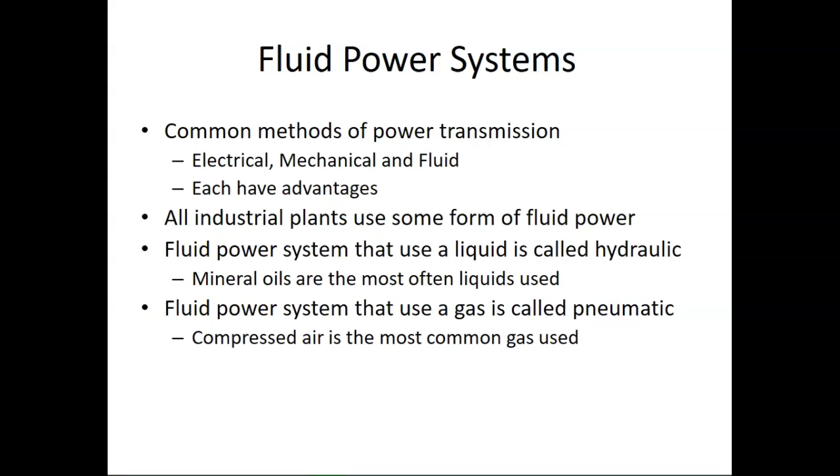So pneumatic systems, there's a lot of things we do with pneumatics. Pneumatic tools, where do you see those? Just about anywhere we want a little extra power that we can't do with muscle power, right? Construction sites use them. That's one of the cooler ones. Construction sites use them a lot.

And what's come about in the last few years is that they've now figured out how to use pneumatics to lift heavy objects and make it where instead of having a 10-man team to push it, you can use only 2 to 5 guys and move something that can weigh several tons. And what they do with that is they create an air cushion up underneath.

Anybody ever play air hockey? Everybody's played air hockey before. How does the puck move? It's air on a table. They figured out how to use that same thought pattern to move extremely heavy objects with like barely a finger push. Think about that for a minute.

Using pneumatics, who would have thought to use pneumatics to move something like that? It takes a lot of air pressure to push against whatever you're trying to move. But once you get it lifted, it moves as easily as an air hockey puck across the table.

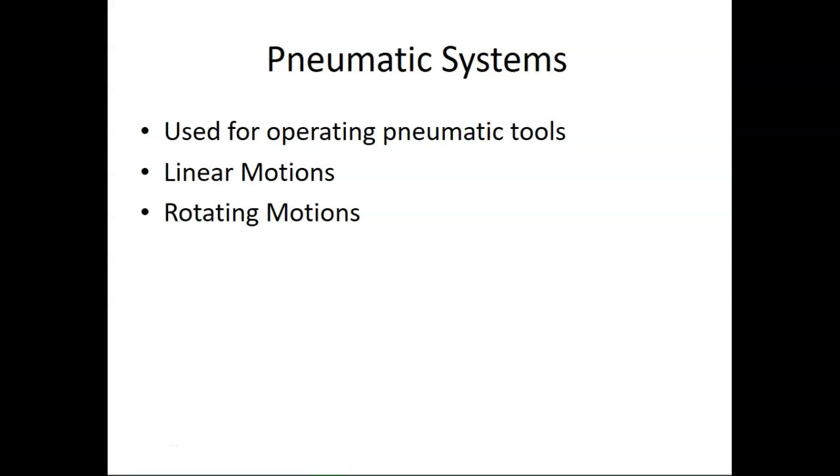Fluid power is the use of fluids under pressure to generate, control, and transmit power. Hydraulics is liquids, pneumatics is gas. Now, some of this is a bit of a misnomer, because yes, you can pressurize gases, you don't really pressurize liquids so much.

Anybody know what happens if you overpressurize liquids? You're gonna blow a seal. You can bust a pipe. You can blow a seal. It's really nasty stuff.

I'll give you an example. I have an older brother, and my dad lent him his truck one time for a long time. Now understand, my brother's not always the smartest man in the world. He decided one day the truck was low on oil, so he put about 5 quarts in it. The truck takes 2. He blew every seal in the truck because of that.

So hydraulics don't like a lot of force. They like a little bit of force. They can tolerate it. It makes them move.

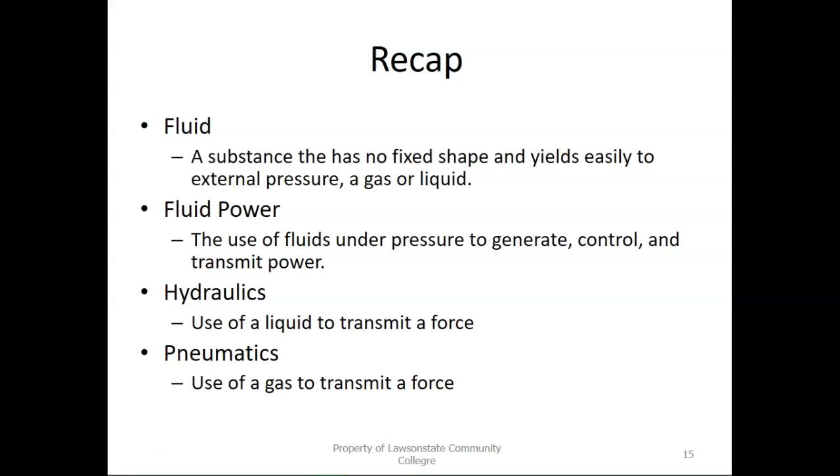So here's some terms that you're going to want to write down or at least kind of memorize. Let's start off with force. And no, I am not talking about the Force. We're talking about force. Sorry, stupid Star Wars joke. Showing my geek.

So force is anything that causes change. It either is the change or changes the state of something else. Newton's laws, that's kind of what we're following here, right? I can't remember which law it is, but every action gives you an equal and opposite reaction. I believe that was the third law. But that's basically what force is. What you're doing with force is making something happen. It's a way to create change.

We're going to be talking about area. And most of the areas we use when it comes to hydraulics and pneumatics, unfortunately, are not square. So how many of y'all remember how to find the area of a circle? Pi r squared? Pi r squared, yep. There's a lot of them out there, guys. There are some easier ones, though.

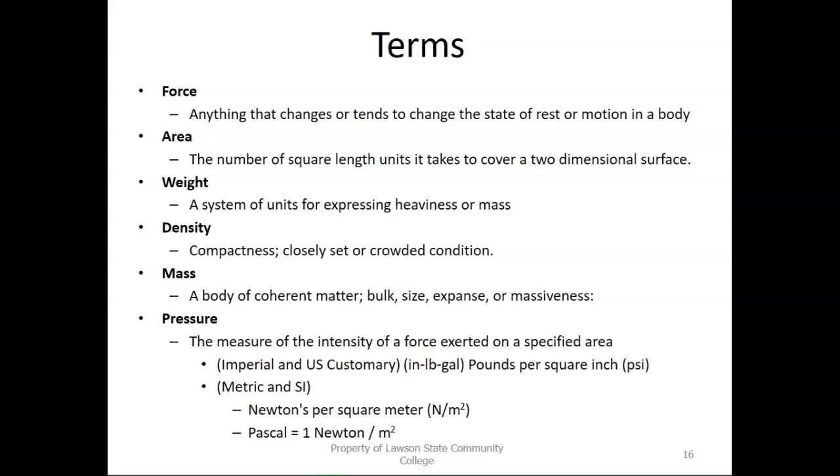So, units. No, you don't have to write this down, this is just how it was working these days. As far as units go, the U.S. customary system is based off of very weird measurements. I mean, seriously, a foot is 12 inches, but a yard is 3 feet. Who came up with that? Who in their right mind? Seriously, think about it.

So yeah, it is still used in the USA, Myanmar, and Liberia. Three countries are holding out onto this. Some of it is still used a little bit in Great Britain, but most of them have moved over into the international standards, which are based on the meter, kilogram, things like that.

So the imperial system is very similar to the U.S. customary system. They do have some measurements that are a little bit different than ours. But like I said, for the most part, those two systems are dead. Why? Because if you really stop and think about most of them, they make no sense at all. Seriously, look at the different tables and stuff and ask me how that happens. So most of the world has gone on to the International System of Units, otherwise known as the metric system. Why? Because it's all based on 10 and it makes sense, and it's very easy to calculate from anywhere in that point.

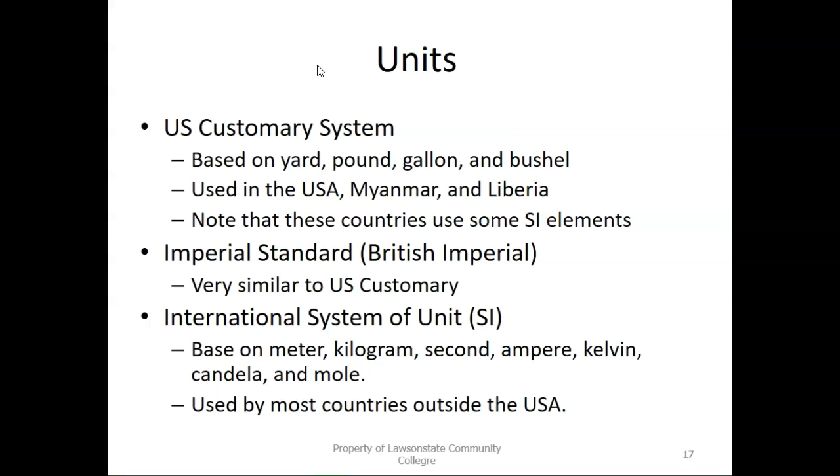So we're talking pressure. This is the amount of force exerted on an object divided by the area. Any of you have ever taken DC or intro? You know what a circle means: it means we've got a formula. So force is equal to area times pressure. Force is area times pressure. And that is a hard and fast one that is true no matter what.

Okay, so there's 3 types of pressure that we measure. So first of all, does anybody know what the pressure you feel at sea level is? Anybody at all? The pressure is 14... At sea level. Now, the reason I'm saying at sea level does not mean that it is not a universal thing you're going to feel. If you go up to the top of Kilimanjaro or the top of Everest, not so much pressure.

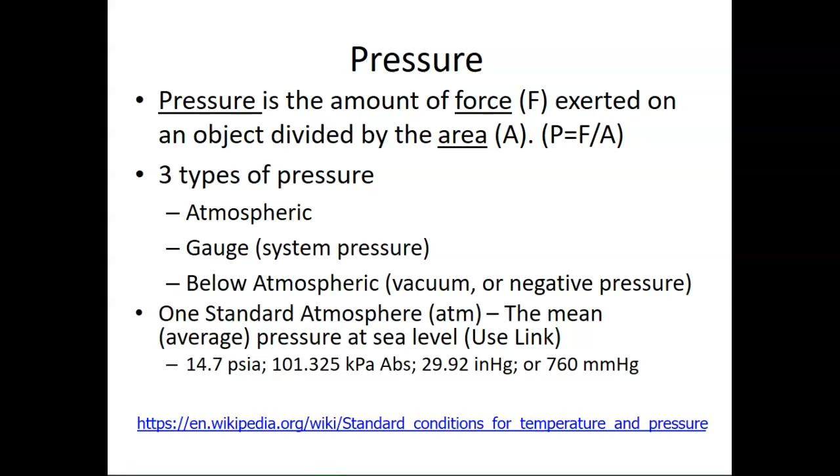Probably would help if I had my mouse on the right thing.

So pressure units, there's a lot of them. You have pounds per square inch. This is the basic and most common one here in the U.S.

Unfortunately for us, the rest of the world is not us, so most of them do not use PSI. They use a lot of other ones. To begin with, you have Pascal, that's dealing with newtons exerted on 1 meter square. You have kilogram force per square centimeter, and I know there's several different ways you can say centimeter. I've always said it centimeter, so if you say it differently, I'm sorry.

Kilogram force per square centimeter, you have bar. Now that one you might have heard of or seen if you look at a pressure gauge. Some of them do have bar on them, or you might have seen KPA. You've probably seen bar. Torr, not so much. Inches of water, probably not very much. Inches of mercury or millimeters of mercury, yeah, those exist and they are used. And head pressure, I'm not sure quite where you would use that, but it is one that is out there.

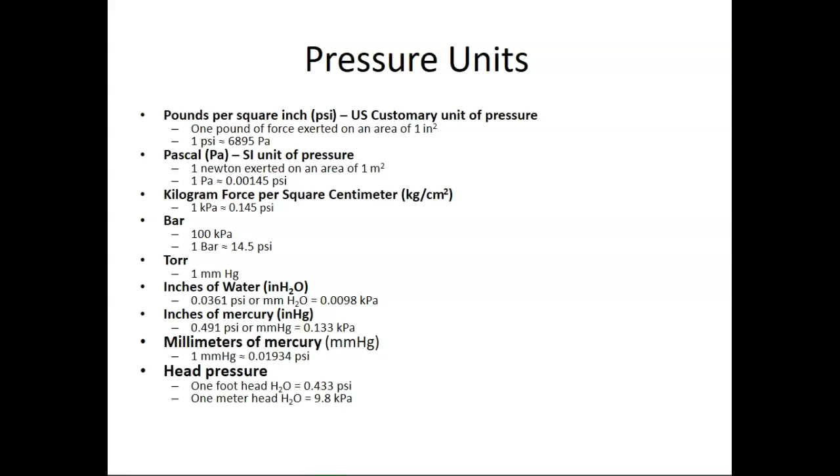And here's some different conversions, quite a few different ones. The main one we'll be using in this class is PSI because we are in America and we still use PSI here very frequently. The other ones you might want to start looking at just to have in your head, because they do exist outside and we do have gauges here that use them.

Would be the Pascal, kilopascal, or megapascal is what that one is. Bar is one that you'll commonly see, and you might see millimeters of mercury, that's the one with the Hg to it. But bar and Pascal are the ones that are most commonly used on gauges you might come across here. I said that we'll be mostly using PSI in this class, but it's just a good thing to know how to calculate these.

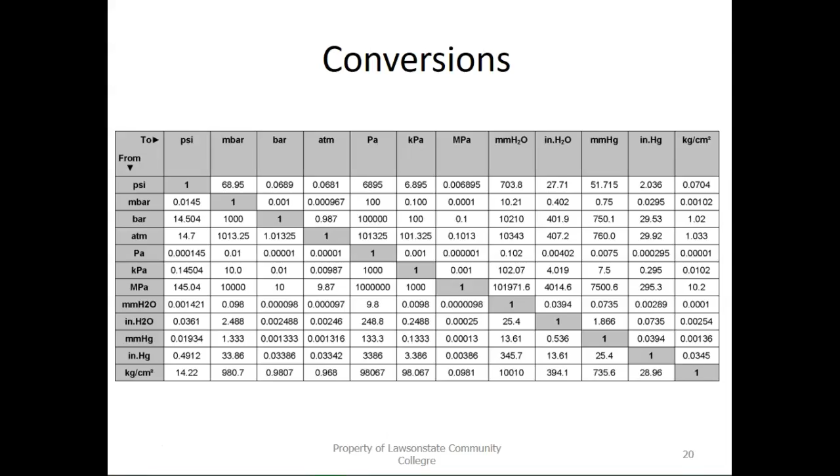Gauges, how many of you, I'm assuming all of y'all drive. So on your car, what do they have as the speedometer? Most cars, I don't know if they have them on all the cars, and especially not the new ones these days, but at one point all cars had miles per hour and kilometers per hour. How did you tell the difference? Same way you tell the difference here. They will give it to you either in a different color, or they just put it on the inside of the gauge instead of the outside.

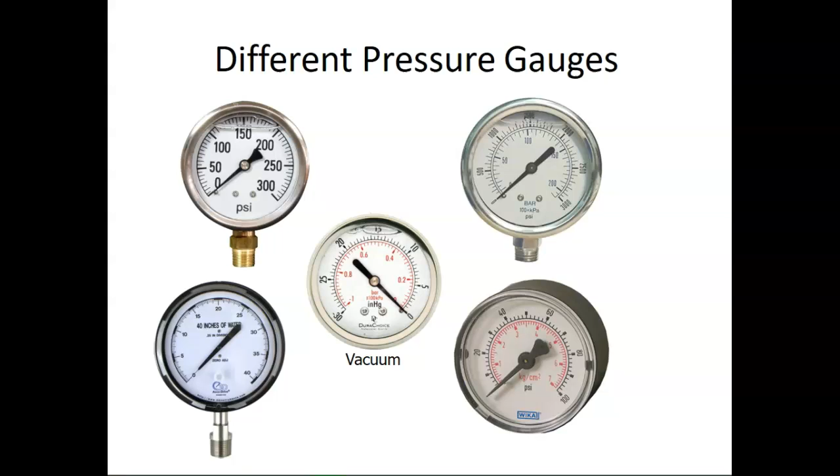This one is pulling a vacuum, and it's looking at inches of mercury, or again, it's looking at bar. So even with blood pressure, it's given in millimeters of mercury, not PSI. Or it could even be given in inches of mercury.

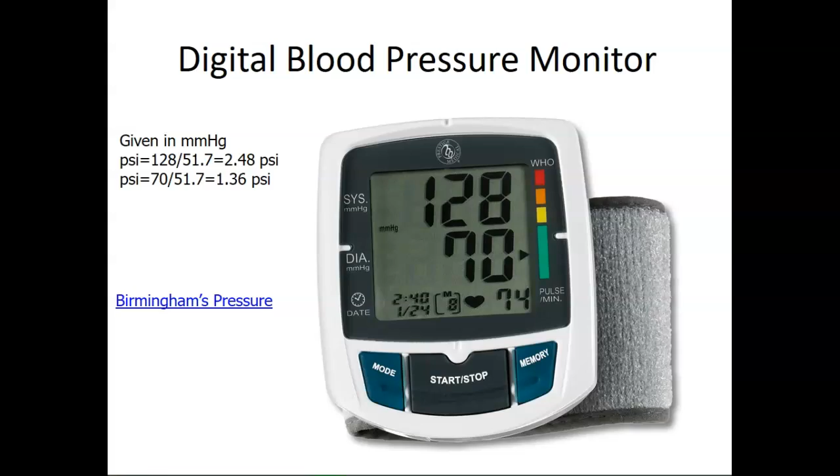All right, so talking about force. This is any action that, when unopposed, will change the motion of an object. In other words, an object at rest stays at rest, and an object in motion stays in motion, unless they are acted on by a secondary force. An object at rest stays at rest, an object in motion will stay in motion unless it's acted upon by an outside force. In this case, we are creating the outside force with force.

So a couple different ways that you measure this. You have the Newton, which is the scientific or standard unit of force that's acting on a 1 kilogram object, causing an acceleration of 1 meter over 1 second squared. You also have a unit equal to the force of a 1 gram object causing an acceleration of 1 centimeter over second squared.

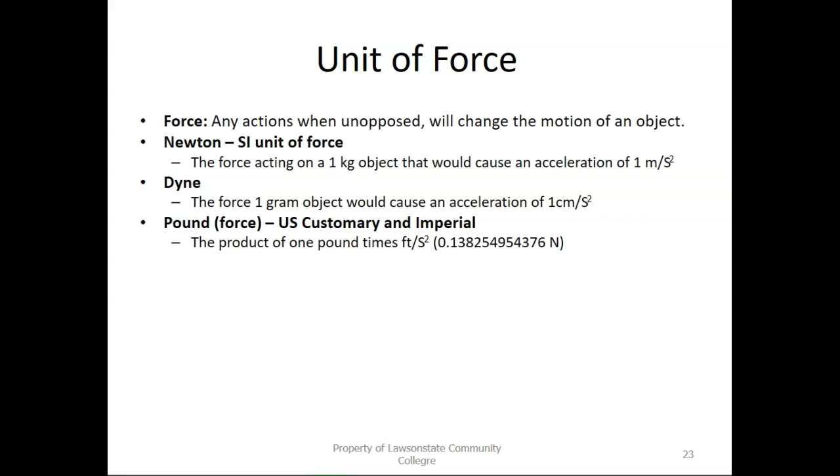So how do we measure weight here? We measure it in pounds, which is why you have PSI.

So work and power. For those of you that have taken my intro and DC classes, how do we generally measure work? In electricity, we measure it as power. If you're measuring power in electricity, you measure it in watts. In this case, we're doing a different kind of work, a more physical work, less electrical work.

Work is done when force is moved some distance. So thus we're going to measure... work is force times distance. The power that comes from it is work divided by time, or force times speed.

We're talking a lot about speed. Why does speed matter? Speed is an output of force, yes. When you get force, force is making something move. When you move anything, that's going to have to do with speed, right?

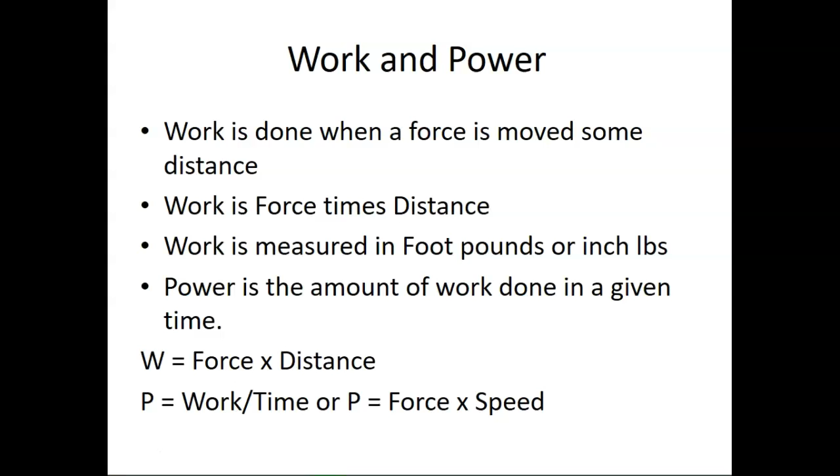Okay, so a couple different formulas. You have work is equal to force times distance. Velocity is distance divided by time. By the way, velocity is another term for speed, you want to use that one instead. Power is work divided by time, or force times velocity, so force times speed.

Very good. All right, let's move on.

So we heard about the name Pascal the other day while we were watching the video, right? So who is Pascal? Well, he's some dude that decided he was going to study fluid dynamics. He wrote the book on it, actually.

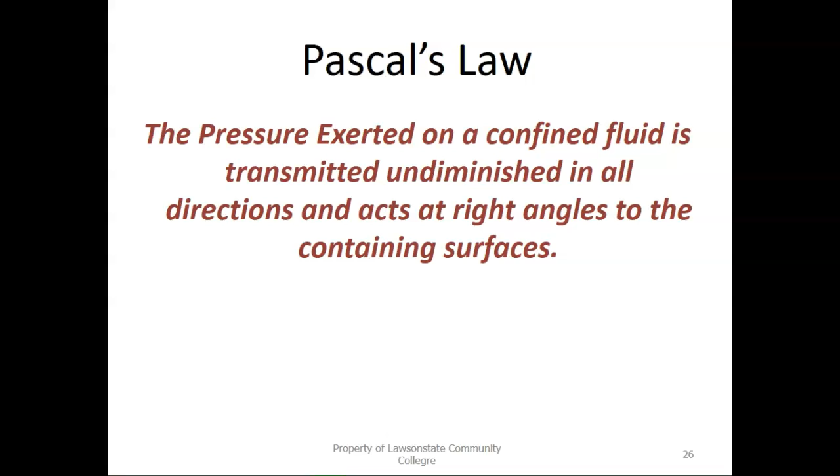That is exactly what this is saying. So it is transmitted undiminished in all directions and acts at right angles to a containing surface. In other words, if you were to blow really hard into a bottle or a balloon, it's going to expand and all the air or fluid is going to try and push really hard against the confining surface areas, right? Because what you're doing is pushing air or fluid through the very middle of it, which means it's pushing away.

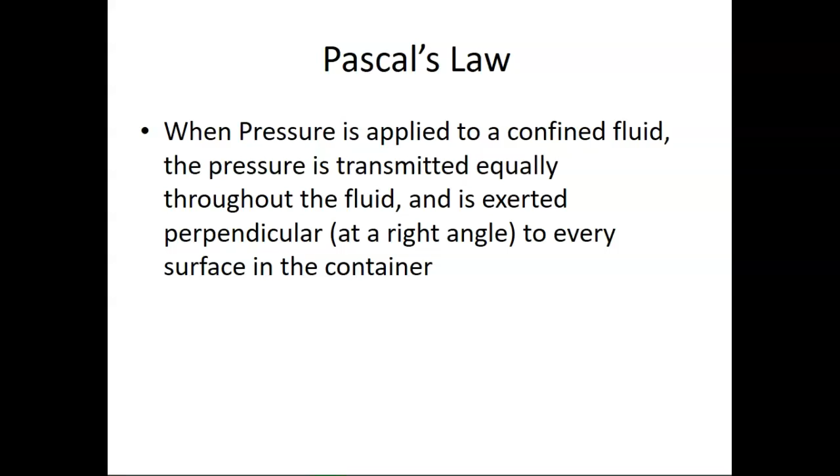So when pressure is applied to a confined fluid, same thing. I need to go through these slides. All right, so this is essentially the same thing I was talking about. If you imagine the outside of this, not so much as a piston and cylinder, but as you blowing into a balloon, this is exactly what you would see. The air is trying to move everywhere and trying to escape. We are confining it.

So a confined fluid, see, this is why you cannot crush a bottle that is still full of liquid. Can you crush a bottle full of air? Yeah, very easily. Crush one full of a liquid? Not so easy, right? Think about trying to crush a can. If you have a can of soda and an empty can of soda, which one's easier to crush? The one that's empty. If you try and crush the one that's full, you're going to have an issue with that, right?

Because no matter how hard you stomp, are you going to crush it? No, not until you break the seal and all of a sudden everything goes everywhere, right? That's Pascal's law.

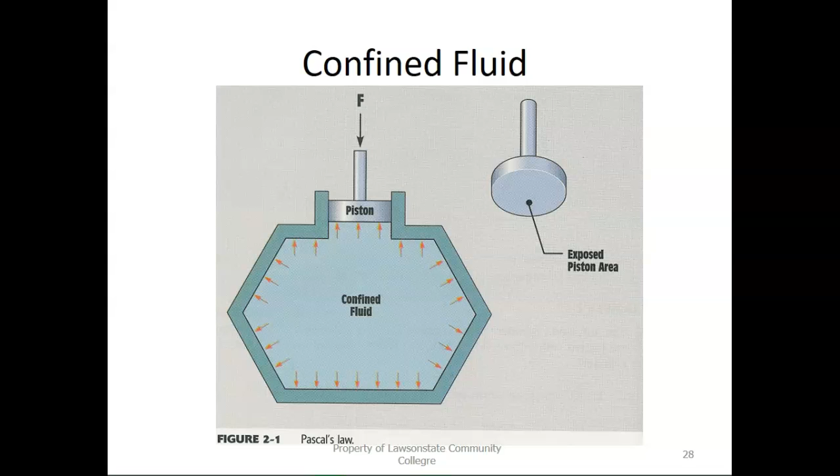So force is equal to area times pressure. Those of you that have never dealt with one of these, this is times, that's divide, that's divide. So if I'm looking for area, I divide force by pressure. If I'm looking for pressure, force divided by area. If I'm looking for force, area times pressure. It's a really, really easy way to work with these formulas.

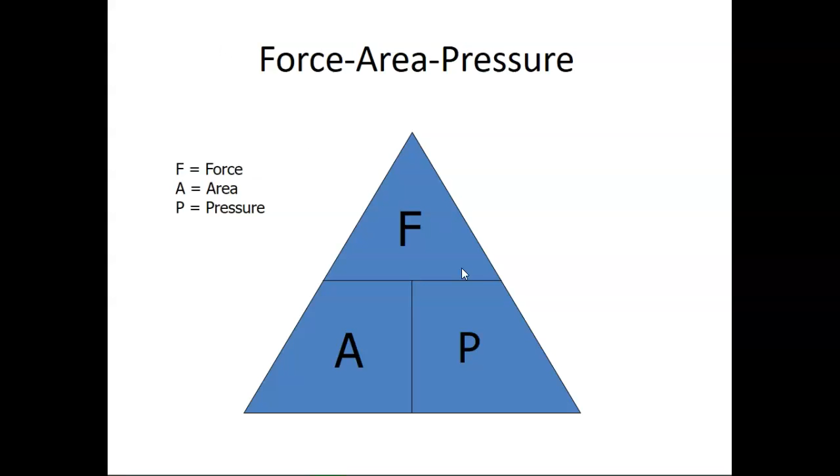Okay? Really easy way to work with these formulas.

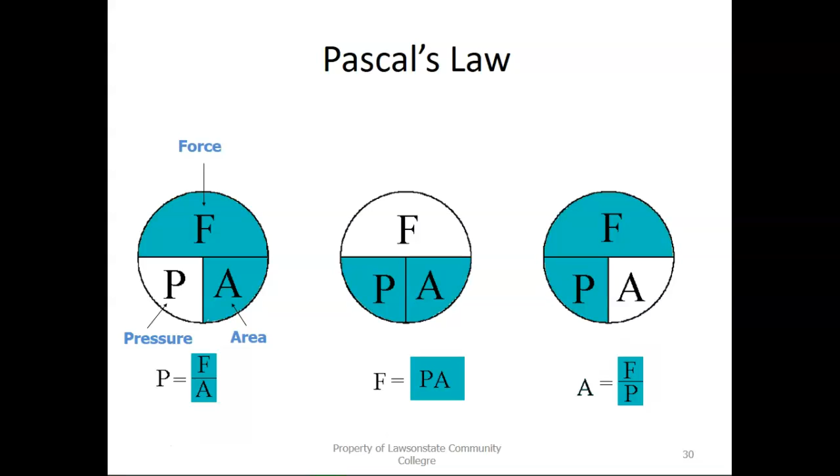So force, area, and pressure with their matching units. You have pounds, newtons, inches squared, meters squared, millimeters squared, PSI, pascals, and megapascals.

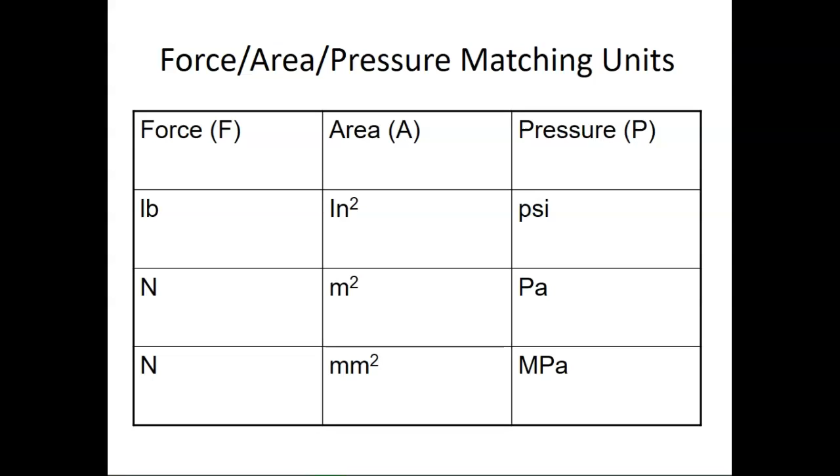All right, so Pascal's law of pneumatic leverage or hydraulic leverage. With this particular one, if I had a secondary piston on the other side, and I put pressure on that piston on one side, what's going to happen to the other one? It's going to go up. It goes back to that, how do you lift a 2 to 4 ton car off the ground enough to change a tire? You might have a very small piston in your car jack, but you have a larger piston on the other side of that car jack. And eventually, with enough upper body work, what do you get? The car lifts about an inch or two off the ground, just enough for you to change the tire and move on with your day.

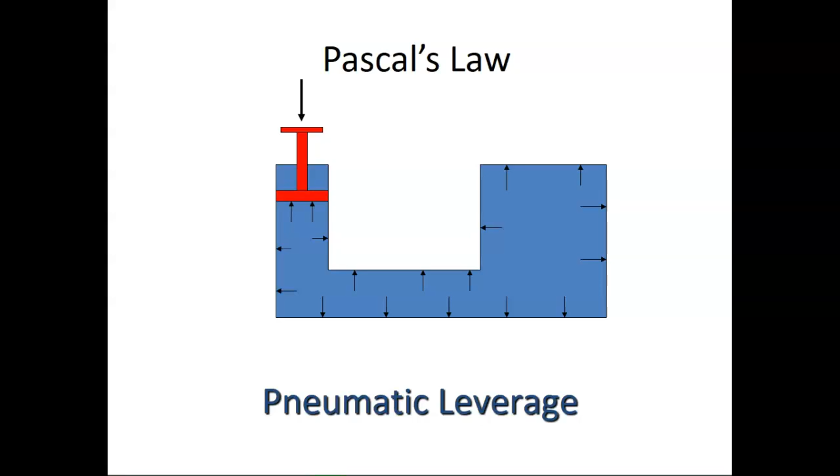Okay? Because that is what is called force multiplication. So pressure developed in one place is used elsewhere and allows forces to be multiplied through the use of piston surface areas. Force multiplication is probably the biggest part of why we use hydraulics and pneumatics.

With hydraulics, we see it in some very big machinery, right? Everything from dump trucks to backhoes, is there a piece of machinery out there that does not use hydraulics in some form or fashion? Not that I can think of. Even bulldozers use it. Why? Because eventually a bulldozer has to do what? They lift that bucket, shake it out, make sure there's no dirt in it, then drive back and do it again, right? That is their purpose. Well, how do you keep that bucket from getting knocked up and down all the time by giant rocks? Use hydraulics, lock it in place. Use hydraulics to lift it so you can knock things out of it. Doesn't matter what machinery you can think of as far as construction goes, at some point it uses hydraulics.

Because that force multiplication means, I'll put it to you this way. Think of the big cranes they use to move steel girders so they can build high rises. Y'all know what I'm talking about, right? Those 100-foot cranes that stand up, or the ones mounted to the top of a building next door so you can swing things around. How do you think they move that stuff? It's all hydraulics. Can you imagine what the mechanics would be if we had to do that without hydraulics? The size of the gears, the ropes and pulleys and everything else, and how complicated it would be. And the more complicated you make something, the more easily it breaks. That's probably the worst thing about more complicated systems. The more ropes and pulleys you create for mechanical advantage, the more complicated it would be, to the point that after 1 or 2 uses you'd be repairing it every 5 minutes. So instead, we use hydraulics, and we get the job done.

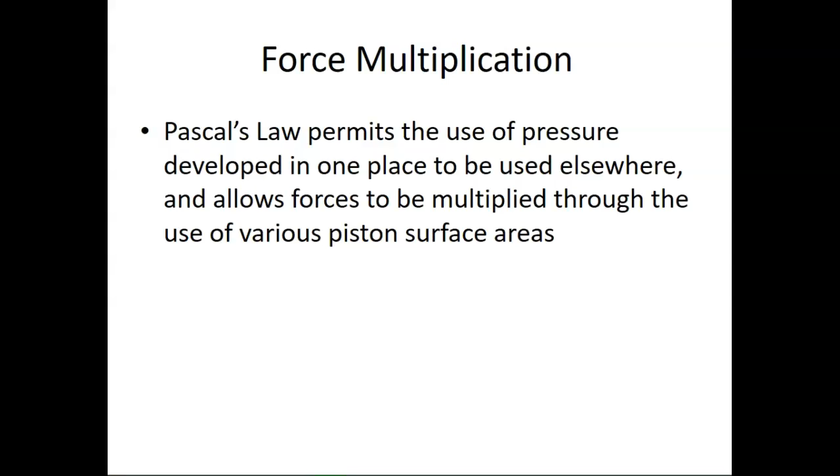All through force multiplication. All right, so Pascal's law. Because I have an area of 1 — I don't think that was supposed to be A-N, I think that was supposed to be meters squared, and that's what we're going to change it to. I will say inch squared, I think somebody forgot the 'i'. So an area of 1 inch squared, we're going to be looking at an area of 5 inch squared.

Now, the problem with force multiplication is that there is no free lunch, right? Can I use this smaller piston to lift the larger one? Oh yeah. But if I want to move that larger one 1 inch, how much am I going to have to move this one? You have to move it about 5 inches, right? Or in this case, as far down as you can get it. Because there is no free lunch with any advantage. To move 1 inch there, you have to move 5 inches here.

However, if I was trying to move it the other way, I would only have to use 1/5 of an inch on that side to move whatever's on this side. So, in other words, think of... anybody ever used the giant airbag things at pools to try and launch something off the other end? Y'all know what I'm talking about? Think giant air cushion.

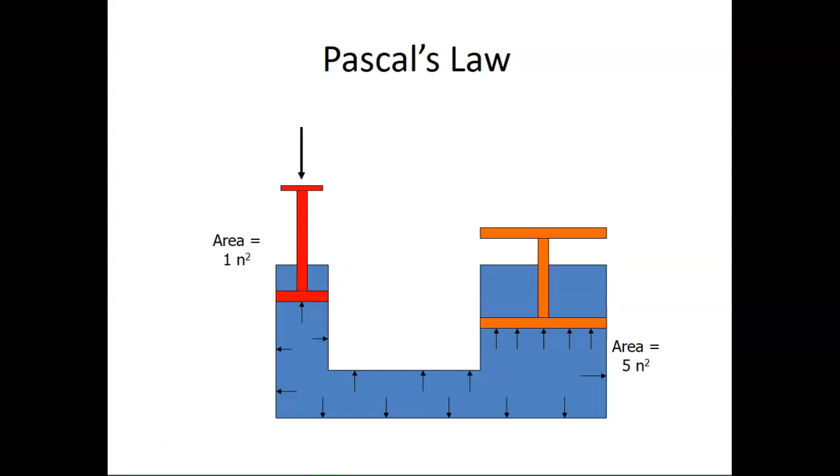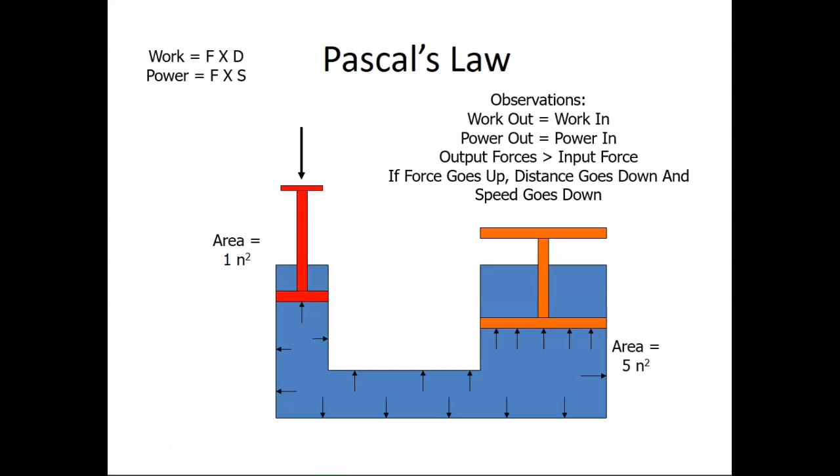We'll come back to this in a minute. All right. So the good thing about fluid power is generally that work out is equal to work in, and power out equals power in. You can get a lot of output force for the input force you give, so on and so forth. It's all the same things I've been saying for the last 5 minutes.

Okay? Now, before we get to this point, part of what we can do looking at force multiplication is we can actually figure out ahead of time what something's going to do. So one of the first things we have to do is... looking at any of this, we need to know what the area of our cylinders are, which I think those are already given to us in this. Yes?

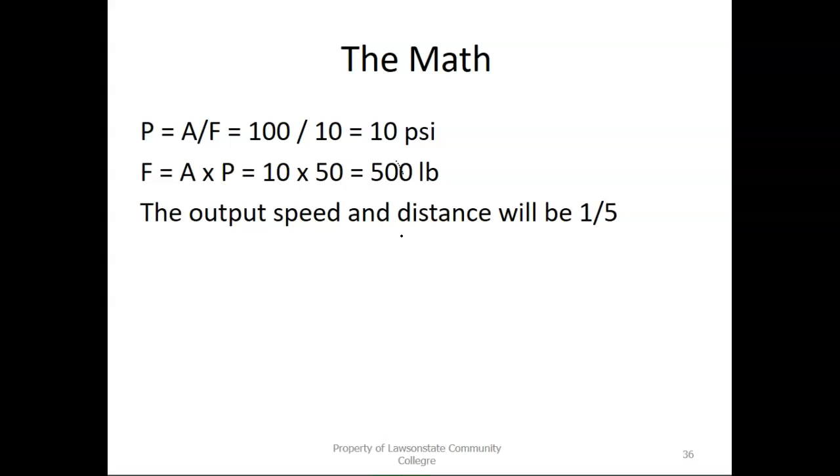So the output distance would be 1/5. So that goes back to how many times do I have to hit the car jack before I actually get enough off the ground to change the tire? Right? I'm working myself to death on one side of the car jack. How much am I actually getting out on the other side? Not that much. Very little. So if I pump it 5 times, and I'm pumping quite a bit, my output could be 1/5 of what my input is. That's exactly what we're looking at over here. This is 1/5 of what is coming out on the other side.

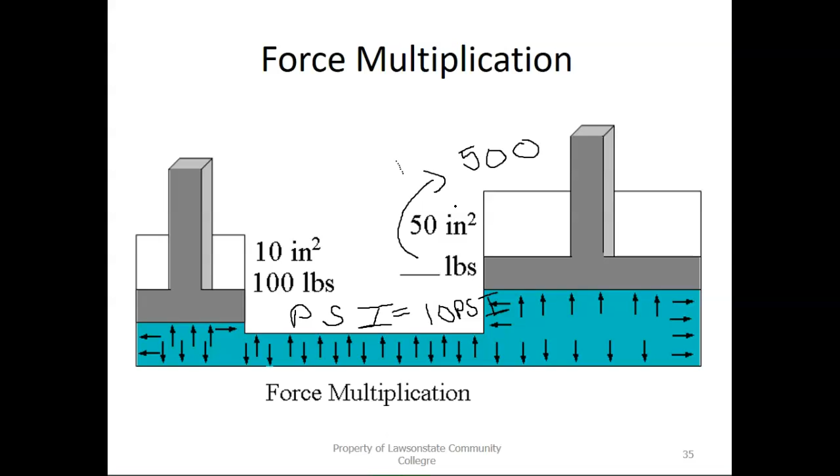If I can find the right book, I've got them. That one's mine. Jeez.

One of those things, I write stuff down in certain ones and not others, and I always forget. So there's several formulas for the area of a circle.

And I might want to write these down. One is your typical pi r squared. You also have pi times the diameter squared, divided by 4. Or you have an easier way: diameter squared times 0.785.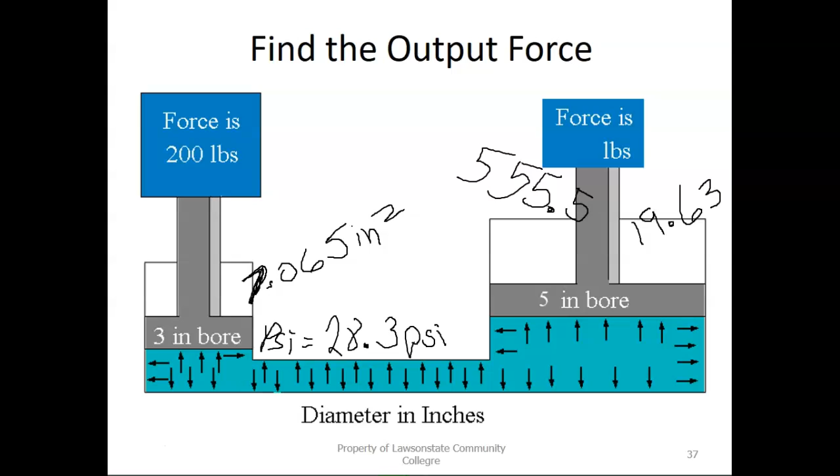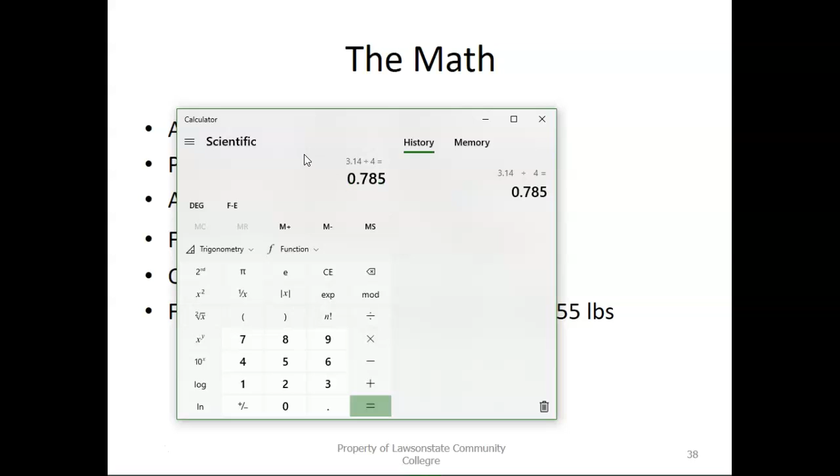So here's your math again. Area 1, you have 3 squared times 0.785, because 0.785 is pi divided by 4. So 3.14 divided by 4 is 0.785. I don't know who figured that out once upon a time, but that is how that rolls. So 3 squared, or 9, times 0.785 should have given us roughly 7.065 inches squared.

To find pressure, you divide your force by your area: 28.3 psi. Your area 2 would be that 5 squared times 0.785, giving you 19.625. Force 2 is 555.5 pounds. And ta-da! Everybody good? Any questions on this problem?

Any questions on this problem or the answers given here? No? All right, moving on.

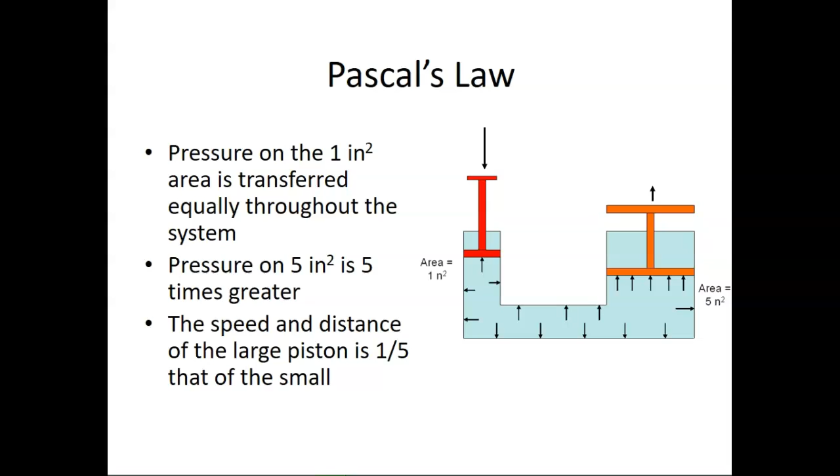So let's talk about how flow occurs. Anybody go to the river at all? Everybody been on a river? Seen a river? So there's two types of flow, and the best visual I can give you is that of a river.

I'm going to erase our formula here. I can write it down later again.

If you've ever been on a river, you know that whenever you've got a nice straight path for it to flow, how does it flow? Is it chunky, rocky, water spraying in your face? Or is it very smooth, almost glass-like? It's a very smooth ride, right? But if you start coming around corners, what happens to that flow? You get disrupted. That's whenever you generally find things moving faster in one place, faster in another. You might find a slow spot somewhere. That's where you get rapids and rocks, right?

So those two types of flow have names. A very smooth flow, like the smooth section of a river, is called laminar flow or streamline flow. What that means is that all your liquid is going in one direction. There's no twists, there's no turns, it's just moving on down the line.

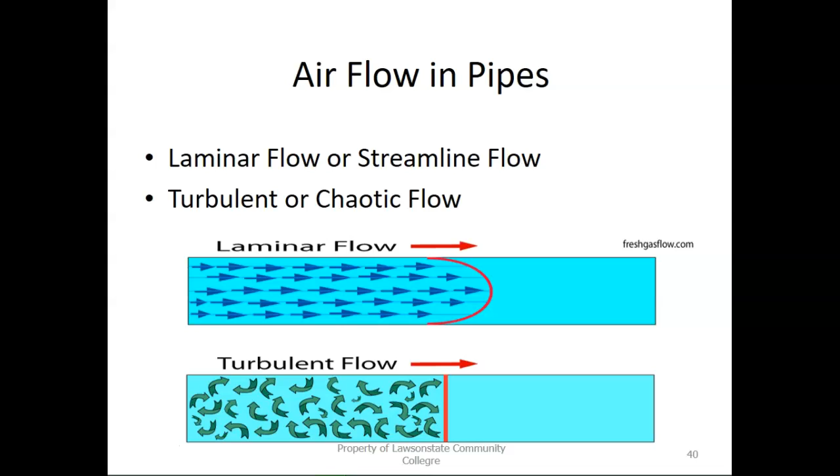So pressure occurs when there's resistance to fluid flow. This is occurring at actuators, orifices of a pipe. So if you change the size of the pipe, or just change pipes period, that can cause a change in your flow.

And that should not be 'values,' that should be 'valves.' Let's change this.

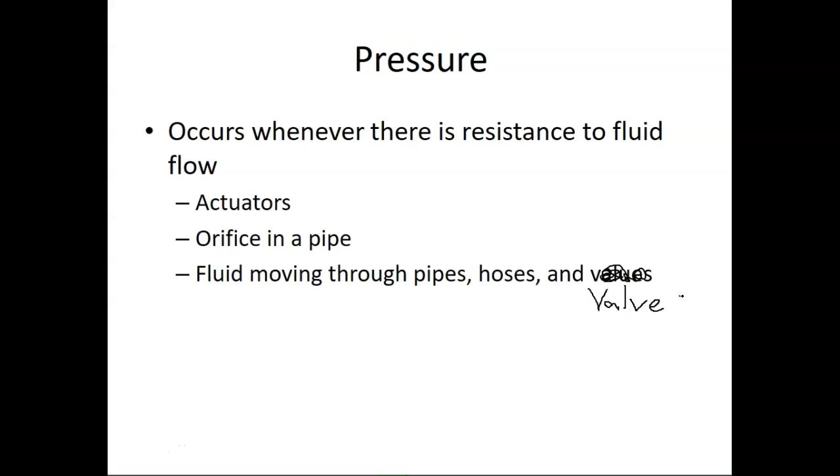Valves, not values. I keep meaning to change that, and now I have.

So pressure is required. If you ever want to move a load, you have to have the pressure to move it. It has to be higher than what's required to support a load. So it's easy to support a car, right? Once you have the pressure to support it, but what if I need to raise that car off the ground? My pressure to hold it, that's one thing. I have to have extra pressure put on it in order to raise it up so that I can work on the bottom of the car. Does that make sense?

One of the things we have to overcome with that is, first of all, friction. Friction is what? Friction means that you have something trying to hold it back, because friction is part of life.

Back pressure in the return line, we'll talk about that more at another point. How can I describe this? Back pressure is one of those things that if you've never dealt with it, it's really hard to describe and understand. But essentially, back pressure works almost like a dam. It ends up pushing and not allowing flow through a river of pressure. It is a very common thing to have, and it's a very hard thing to describe beyond that. We will actually be doing it whenever we get to lab, so at that point it might be a little easier to talk about.

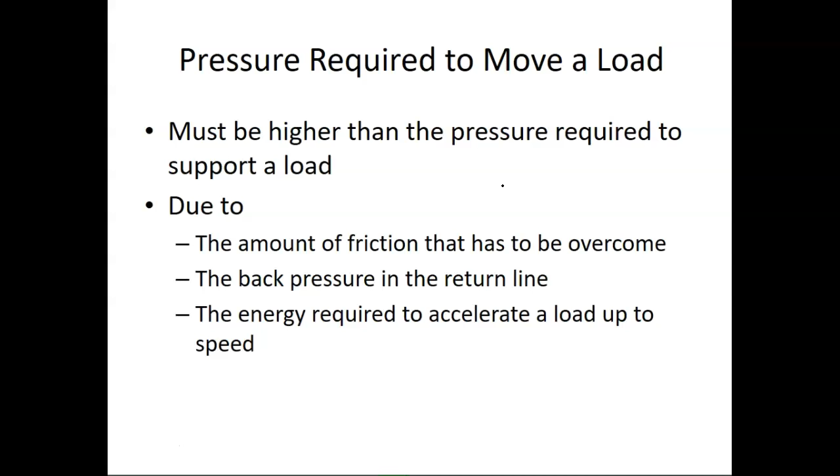So think about some of those big cylinders we saw the other day on the video. How hard were they working? You got a really heavy load, let's say a full bucket load of limestone. It's going to take a little bit more to move that bucket than if the bucket's empty, right? That's what pressure to move a load must overcome.

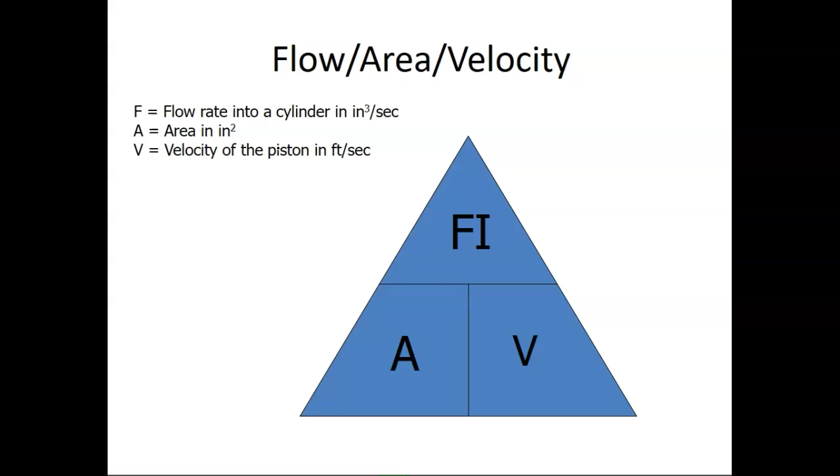So the flow rate into a cylinder is in inches cubed per second. Area is inches squared. Velocity of the piston is in feet per second. We don't really work with this particular formula very much, but that is how they start looking at the speed a cylinder will move.

I think I need to go back through this at some point and actually start messing with it.

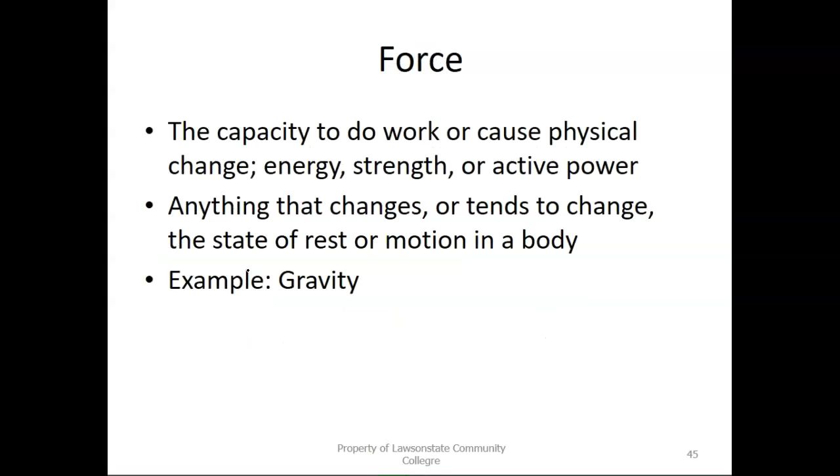So area, I think we've already talked about this, is included with a set of lines. It's the amount of surface within a specified boundary measured in square units. It's generally length times width for squares or rectangles, or you have your formulas we've already talked about: pi r squared, pi times d squared divided by 4, or diameter squared times 0.785.

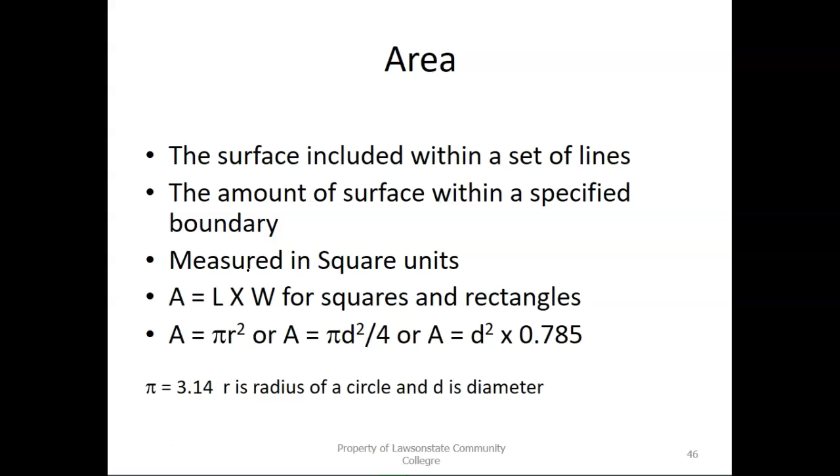All right, we've already talked about pressure. Now there's a little bit more I want to touch on with pressure. Pressure is the condition of being pushed, force coming into direct contact with something. Compression is a form of force. But there's two types of actual pressure and the way we measure it. If you remember, what did I say the pressure on Earth is at sea level? 14.7 psi. That is the average pressure you feel at sea level.

So in order to compensate for this and actually figure out the pressure a system is under, we have a gauge pressure which takes that 14.7 already into account when it goes to 0. There's two types of pressure: you have gauge pressure, and let me erase some of this and give myself some space here. So you have PSIA and you have PSIG. PSIG, that's supposed to be a lowercase g. PSIA, this is true 0, so that means you end up adding 14.7 as part of what you're seeing on that gauge. Does that make sense?

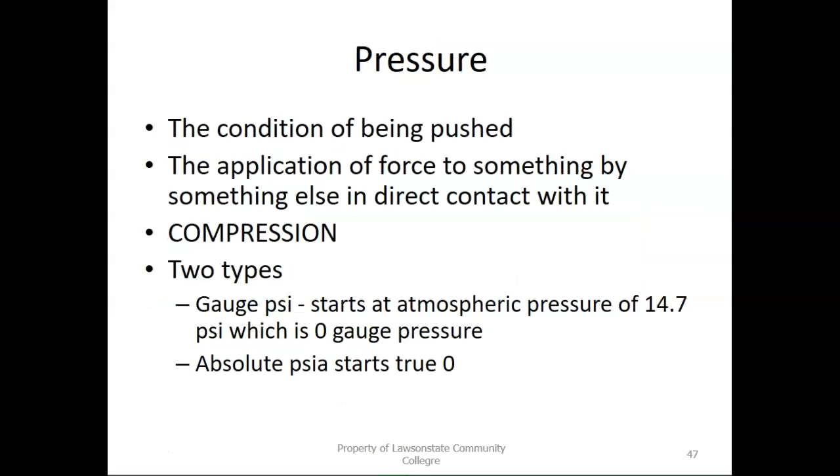So let's talk about cylinders, because these are probably one of the most common types of pneumatic and hydraulic movers. We'll call them movers, because this is probably one of the most common things you'll find on a pneumatic or hydraulic line. They're cylinders. What we have are two parts of them: you have the bore and you have the rod.

You have the bore, you have the rod. So we use two different areas for calculating for a double acting cylinder. Because let's put it this way: if you're pushing on something, would you rather have something in the way of what you're pushing on, or would you rather have a flat surface to push on so you can get the job done? Which can you apply more force to? Flat surface. So two different areas are used for calculating what is known as a double acting cylinder.

The reason it's called a double acting cylinder is because if I put pressure on one end, it will cause it to extend. In order to make it retract, I put pressure on the other inlet. So if I want to extend, I push at the bore. If I want it to retract, I push on this side of the bore. So if I'm pushing on this side of the bore, what gets in my way? The rod. The whole thing is the cylinder.

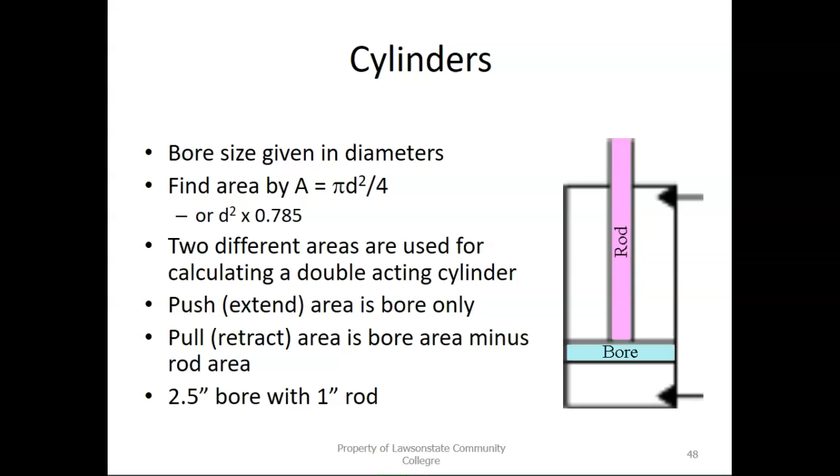So looking at this, let's talk mathematics here. Okay. In about 10 minutes, somebody remind me, let y'all have a break.

So looking at these cylinders, what would be the extend and retract force of a cylinder with a 2.5-inch bore, a 1-inch rod, and 750 psi of pressure. Okay.

All right, so first of all, let me kind of do it this way. So here's our bore, here's the rod. Okay, got my little air inlets here. So my rod is 1 inch, my bore is 2.5. I know it's a terrible picture, but it is what it is. I'm dealing with 750 psi.

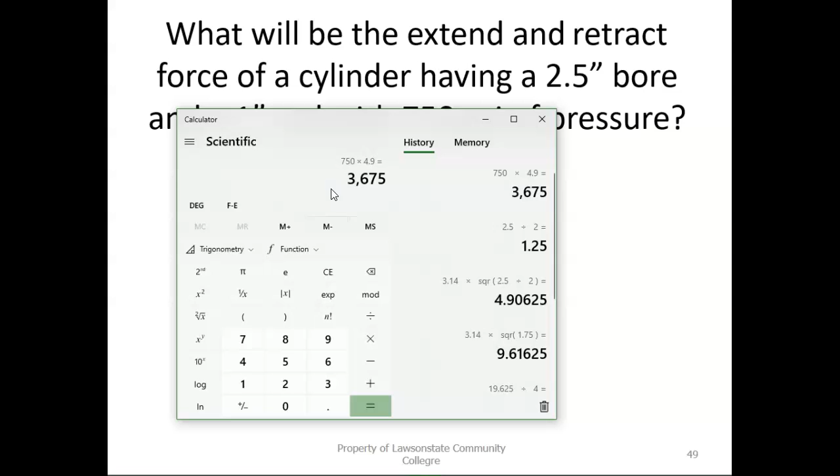So that is just your push. Okay. That is just the push. So we also still have to find, so that's extend, or you can call it extend. So what about our pull or retract?

Now, here's the fun part. When I'm looking at pull, am I just looking at the bore? No, you've got to look at the rod too. So what you're going to end up doing is bore minus rod. So 4.9 minus 0.785. What's that give me?

Because think about it like a wall. If you've got a piece of lumber sticking out of a wall and you're trying to push against that wall to push it down, are you going to have as much surface area to work with when you have that piece of wood sticking out? Does that make sense?

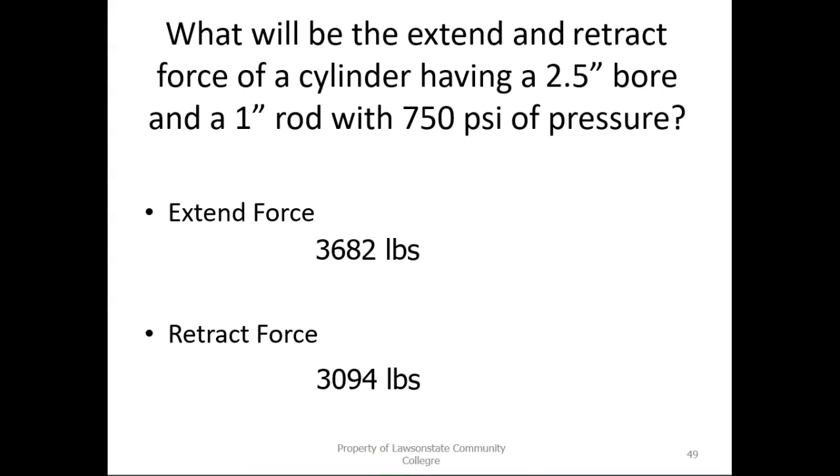Okay, let's see how close we got. All right, so my extend force - we got pretty close. 3,675, I think that's what the book says - 3682. Yes, it is, this little book is claiming 3682. It's mathematics, and pi is sometimes extended more on some things than others. Retract force is 3094. That's not even the right one in the book - that one's 3092 in the book. But I digress, so very close enough, close enough you wouldn't really notice the difference.

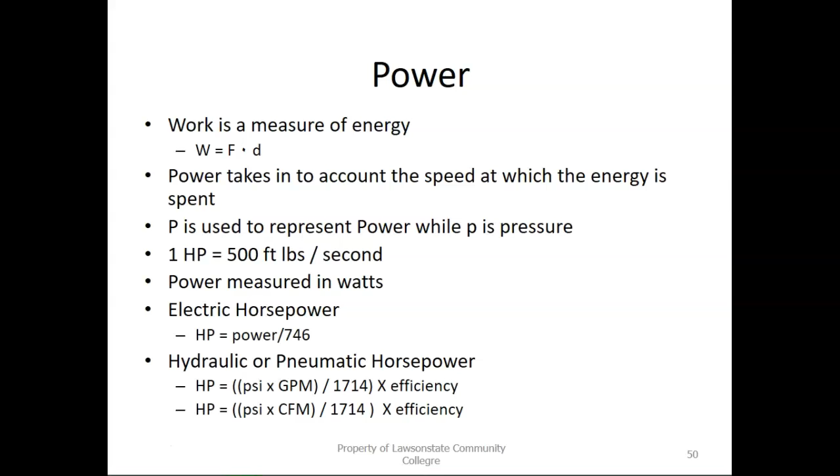So we have Bernoulli's principle. Now we kind of talked a little bit about this, and it's exactly what I told y'all - basically this is how your shower head works. So to increase the speed of a fluid, you decrease pressure or decrease the potential energy. So the speed of a fluid increases with a decrease in pressure or a decrease in the potential energy. You'd think it would happen with an increase in pressure, but not. We'll dig into that more at another time.

So how do you get water out of a garden hose to go faster? The even easier way, you clamp it closed. That drops the pressure right where you're at, and then when you release that crimp, how fast and how hard does that water move? All of a sudden it moves a lot faster, a lot harder, and a lot easier.

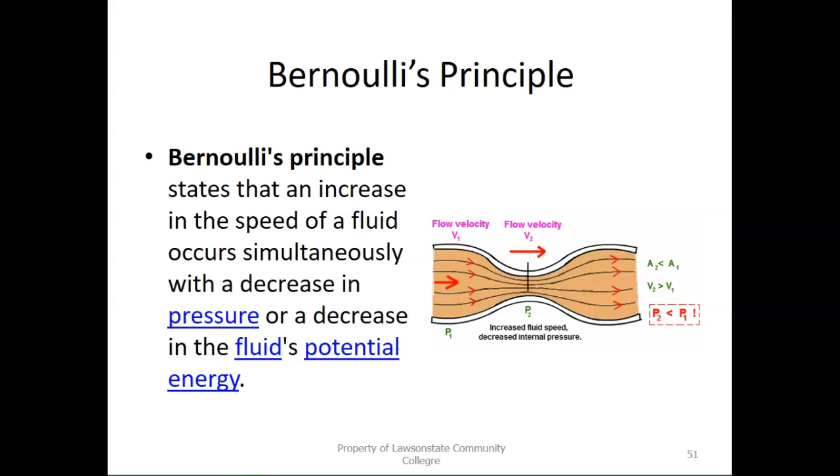Everybody good? So then we have another law, and this is Charles' law. What this essentially states is that temperature and volume kind of go hand in hand here. When the pressure of a gas is held constant, the volume and the temperature become directly related.

So pressure on Earth is pretty much the same as we're at, right? When the temperature rises, the volume of the air, humidity, tends to go up. Whenever it's cold, the volume of the air, or the amount of humidity and everything, goes down. Make sense? So the temperature and the volume become directly related. So think pressure cooker.

Right? Has anybody ever used one of those? An Instapot or whatever they're called. As you cook it, as you increase the temperature inside it, what happens to the internal pressure? It goes up a lot, right? However, as that food cools down inside it, what happens to the overall internal air? It condenses, thus it creates a vacuum. It sucks that lid down. Well, you're not supposed to do that.

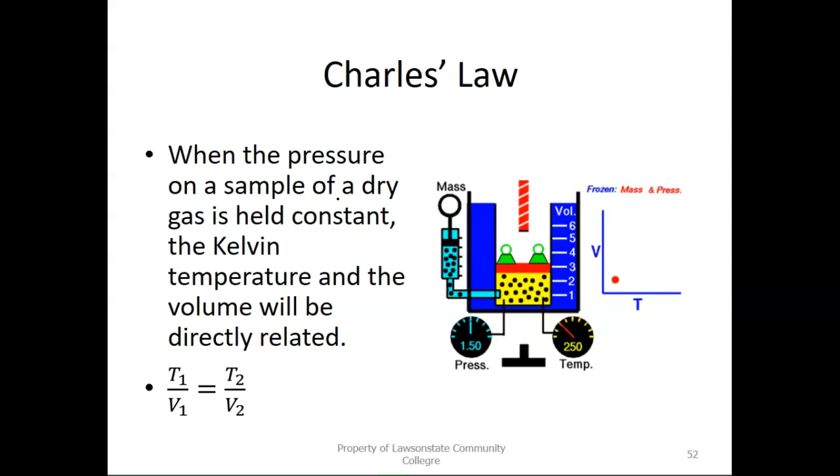So Boyle's law: the volume of a confined gas at a constant temperature varies inversely with its pressure. Okay? So as the volume rises, the pressure falls. Is that what that's trying to say? Yeah, the temperature goes down because you have more volume there.

How to explain this a better way? As the temperature's going up, the molecules expand out. That's why we have so much more ability for humidity in the summer. Does that make sense? Because the air is less dense with air molecules, it absorbs those water molecules more readily. And as the temperature goes down, all the air molecules condense. Make sense? And thus it squeezes the water out of the air. Sorry, it took me a minute to try and process that back to a way that actually worked.

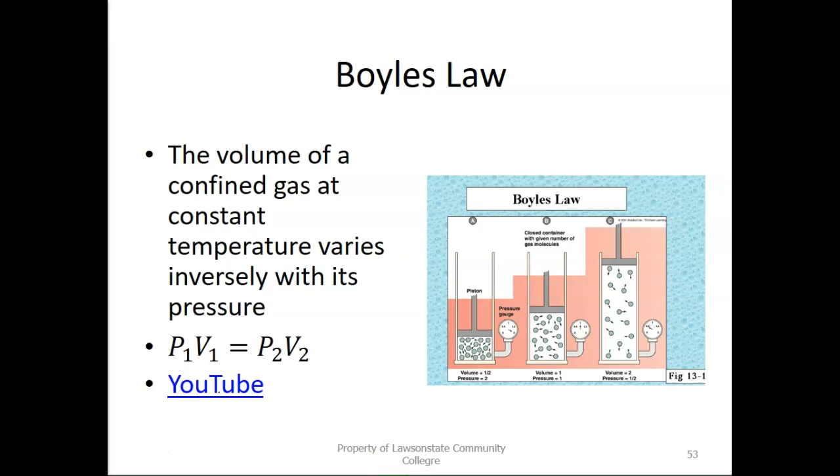All right, everybody good with Boyle's law, right?

So hydraulic or pneumatic systems, the best way to talk about them is the fact that they're much like electricity, separated into three different segments. Now, electricity, what three segments do we have? Supply, path, load. In this case, we have a little bit different because the lines are always going to be there to move it. We have a different set of three, but pretty much the same way. We have a power supply or your source, we already have the path, but we have to have some form of control, and we have our load. The only thing that changes is instead of worrying about path, you're worrying about control. How am I moving that fluid from one place to another? Does that make sense?

Those of you that have taken rudimentary electronics, same principles, you still have a set of three things you're looking for: a source, a path, a load. Only you're looking for a source, you're looking for what controls it, and you're looking for the load. The load does the work. The source creates a way to move things to where that load is. And then you have, in this case, control instead of a path, because the path is kind of a given. Does that make sense?

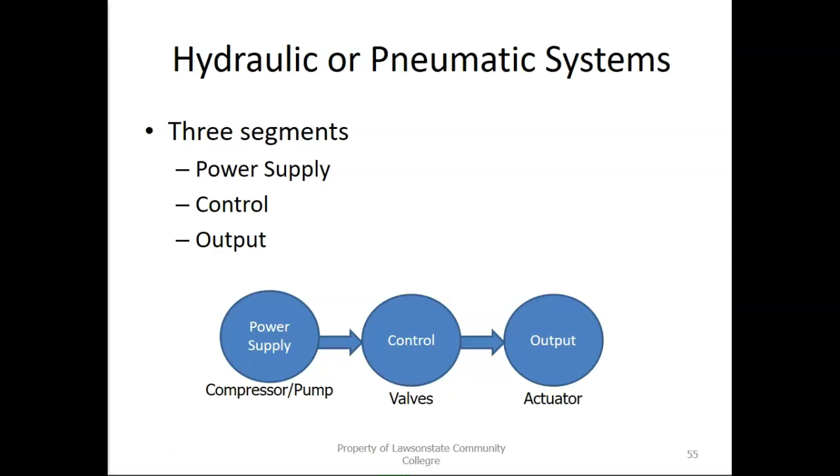All right. So the power supply tends to be—well, let me back it up. All power supplies with hydraulics, pneumatics, or electricity are all based on either motors or, in the case of electricity, generators. You have to have electricity to move any of this. Now, that electricity comes in one of two forms. It can be either started off by the combustion engine, or it can be started off by an electric motor. Now, the electric motor is what you find in a permanent compressor or... why is my brain—a compressor or pump, excuse me. All of a sudden I had a brain blank.

Okay, so dealing with a hydraulic system, you have a pump. If you are dealing with pneumatics, you have a compressor. Now, electric motors you find in the permanent ones, the ones that are installed to be there forever. Y'all know what I'm talking about?

You're talking about compressors that can be either really small—generally in the house for good—or you have the really big ones that are bolted to the floor and really can't be moved. One way or the other.

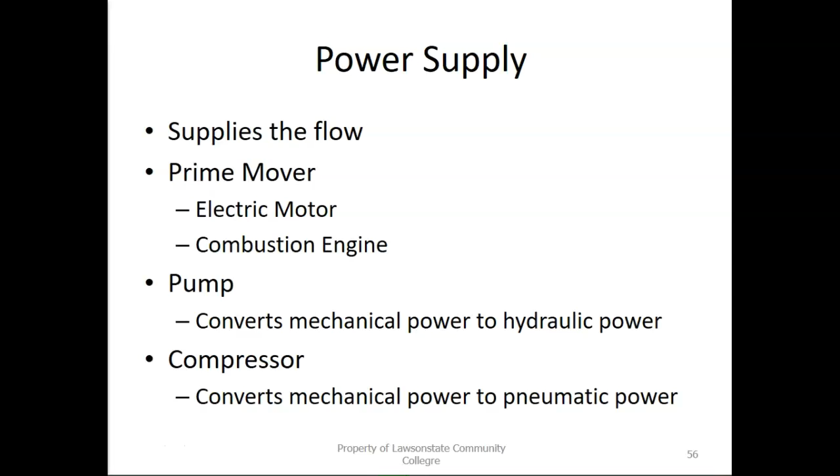You have your output section, and this includes actuators like cylinders, and you also have two other types of actuators. One is what is called a rotary. This one rotates with set limits.

Think about how many of y'all remember the old rotary phones, or have ever seen them, where you stick your finger in it, dial that particular number, move it all the way to where it needs to be, then release. That's rotary.

Well, guess what? Rotary actuators work the same way. It only rotates to a certain degree before it zips back, using a back-and-forth motion like that. It's not going to rotate all the way.

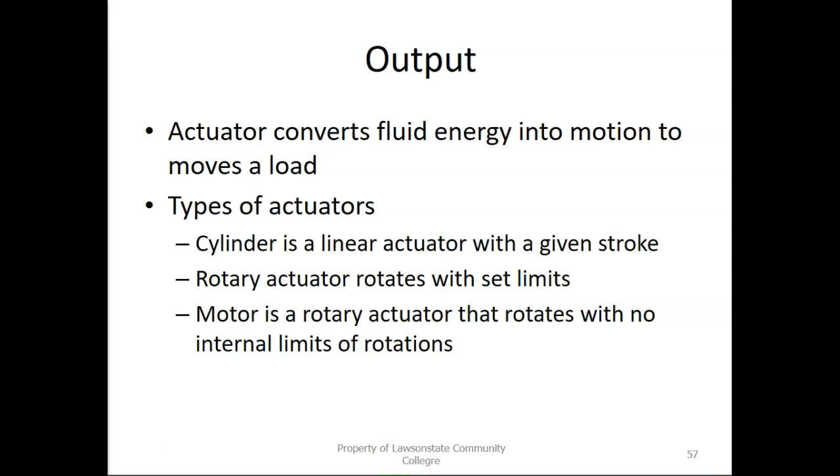With motors, we do have pneumatic motors and you will be using them in lab. These have just like a regular motor—they rotate perpetually. We will be using those in lab. It's actually kind of fun.

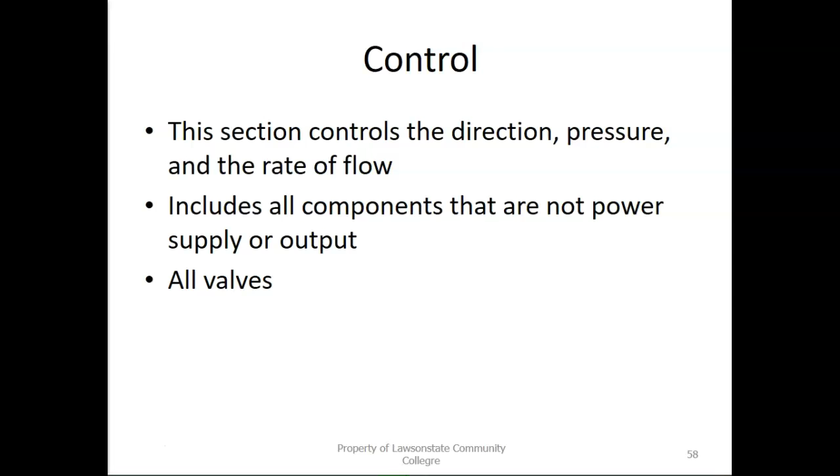So the other thing we have to deal with is what is called the control. The control is meant to literally control where, how, and why everything flows and moves. It controls everything about how things move. So anything that is not power, a power supply, or output is all included in this. We'll get into that more as we get into lab.

So components that we have to deal with: we have filters. Those are probably one of the biggest, most important things to get overlooked. What happens if you don't change an air filter or an oil filter? Anybody ever seen an air filter in a house that's not been changed for, let's say, 3 to 5 years?

For anybody who's ever been in HVAC, that is a true nightmare because those things are so clogged up you cannot get air moving through that system at all. Generally that thing is so gunked up, especially here in Alabama. Think about it—dust plus humidity turns into mud. Basically it almost looks like you have mud caked on those things. Think about that for a minute. Ew.

So you have compressors or pumps, depending upon which one you're dealing with. Compressed air can run really hot. It's not something you want to have in your lines all the time because it can degrade them. So some of them have what are called aftercoolers. We'll talk more about that another time.

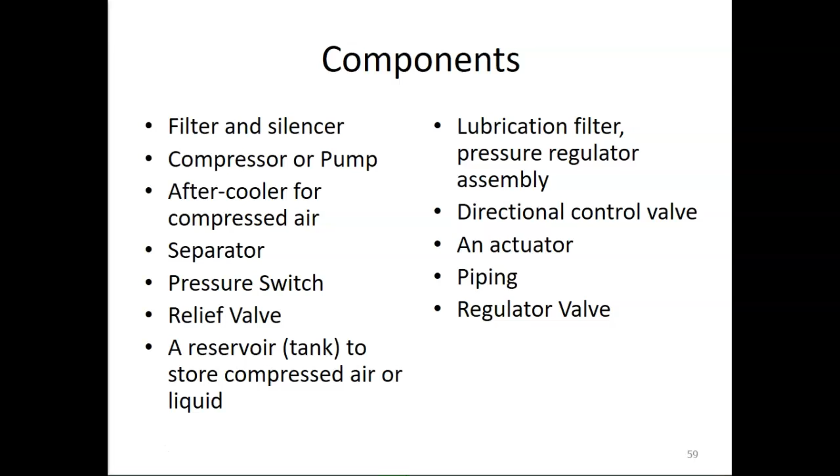So, hydraulics versus pneumatics. Hydraulic is powered through liquid, pneumatics powered through gas, of course.

So some of the differences: hydraulics are not compressible. Now, that sounds kind of like a misnomer, doesn't it? Because we're talking about how much pressure we're using on certain parts. But the truth is, it's how much force and speed we're moving it with. Does that make sense? It's not so much that we're creating a true pressure with hydraulics, because you can't.

Think about compressing any kind of water bottle or anything with liquid in it. What's the problem with that? You'll find it very quickly kind of gives out, busts a seal somewhere or breaks somewhere else, and it's free to go. So it's not compressible, even though we are able to use pressure with it. Does that make sense?

It in and of itself creates its own pressure, I guess you could say. Be a better way to say it. Gas is highly compressible. Only there is a point where if you overcompress gas...